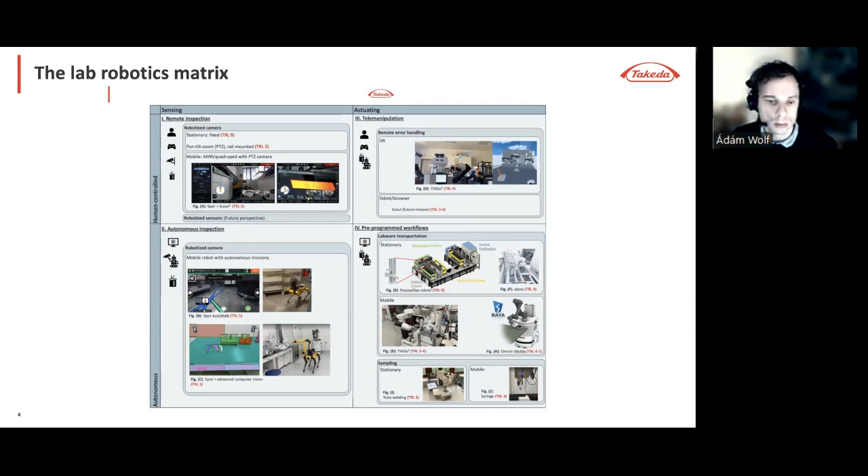So first, let's review an overall landscape of supportive lab robots. And for that, we created a systematic visualization with a two-dimensional matrix. On one axis, we represent what we want to use the robots for: whether we want to get some data from the lab via sensing, or whether we want to actually manipulate something in the lab with actuating. The second axis, the vertical one, represents whether a human is directly controlling the robot, or whether it's autonomously executing a sequence. So let me zoom in. It's quite a crowded figure.

We will begin with the first segment. That's the remote inspection. The robot is equipped with a certain type of sensor. In most cases, it's an RGBD camera, at least that's what we were experimenting with the most. The idea is to let a remote user, a standby worker or a lab expert from across the globe, take a look at a specific laboratory unit operation. Maybe there was an error, an alarm triggered, and we want to know what happened. So one would log in to a web interface, drive the robot to the location where the error occurred, and use the camera or other sensor to acquire information about what happened and whether an actual in-person deployment is needed to resolve the error.

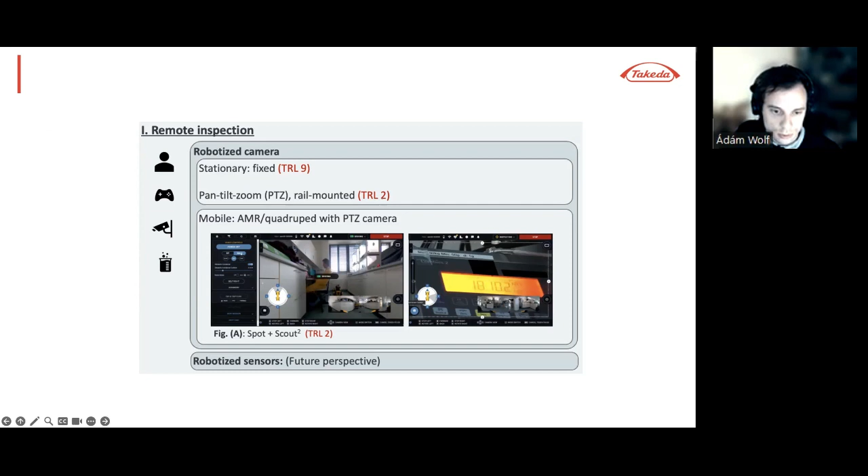The second segment is when we do it autonomously. The robot does the same, acquires visual data about a lab operation, but this time the path that it covers is pre-programmed. So you can have points of interest in the lab defined where the robot would take a picture and transmit that visual information to a computer vision algorithm to detect anomalies or just to track the status of the lab. There can be different use cases in this regard. This segmentation example on the bottom left is just one example where objects were detected and localized on the picture, and the semantic interpretation of the scene resulted in detecting anomalies in the workflow.

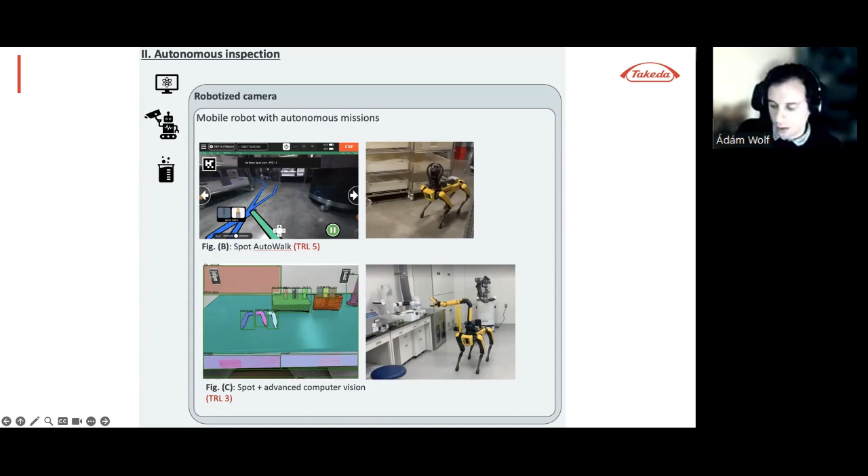The third segment is an interesting one. It's a combination of the remote inspection capability with actual manipulation capabilities in a human-controlled fashion. That means someone is controlling the robot, seeing the visual feedback from the robot, but is also capable of moving the arms of the robot to intervene in the lab process if needed. If there is an error, you would not just be able to assess what happened, but use the arms of the robot to actually resolve a physical error if it's possible.

For that, a student project focused on creating a virtual reality-based cockpit, where the user saw a three-dimensional stereoscopic image in the middle coming from the stereo cameras of the head of the robot, and also the wrist cameras for fine manipulation tasks. With the virtual reality controllers, the user was able to move the robot's arm with fine precision and manipulate objects. A series of tests was conducted to assess the usability, and lab users were capable of driving the robot and performing these basic manipulation tasks. It's important to mention at this point that on each slide, you see these red TRL numbers.

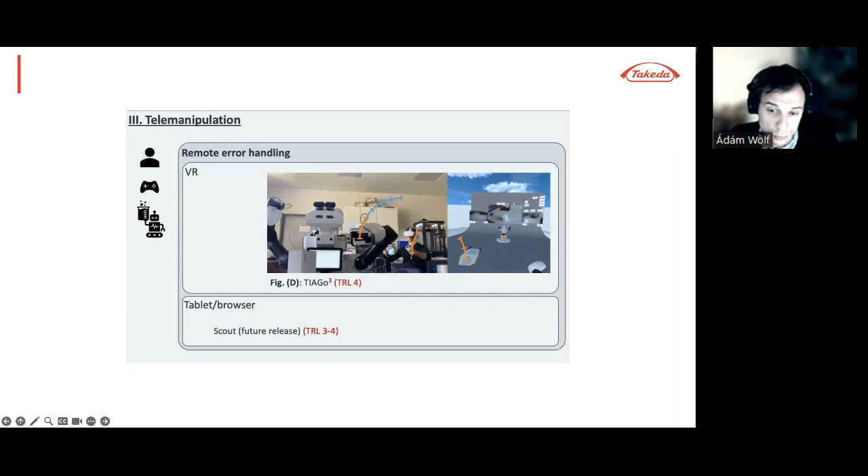And that's actually a lot of what we do in our team. We work on new emerging technologies and look for ways to deploy them in actual lab use cases. And now the final fourth category, and the biggest one, the most important one, and also the most mature one, is of pre-programmed workflows. So this means that the robot does something in the lab actively, performing manipulation, and does so in a pre-programmed sequential fashion.

So this is how most robots actually operate. Also in other domains, they have a program, a motion sequence that they perform, and that does something in, let's say, the manufacturing process. But here in our case, of course, it's nothing like that. It's more the laboratory tasks, such as labware transportation. That's one of the biggest use cases. Robots do that both in a stationary benchtop setting and in a mobile setting.

So the latter is a relatively new field, gaining coverage in the laboratory setting, but also introducing a lot of complexity. And to that, I will talk in more detail later. But here I also want to mention another use case, which is sampling with the robot. So basically, in a laboratory, let's say a biologics process development laboratory, a common use case is having to take samples from different unit operations, let's say a bioreactor or any other instrument.

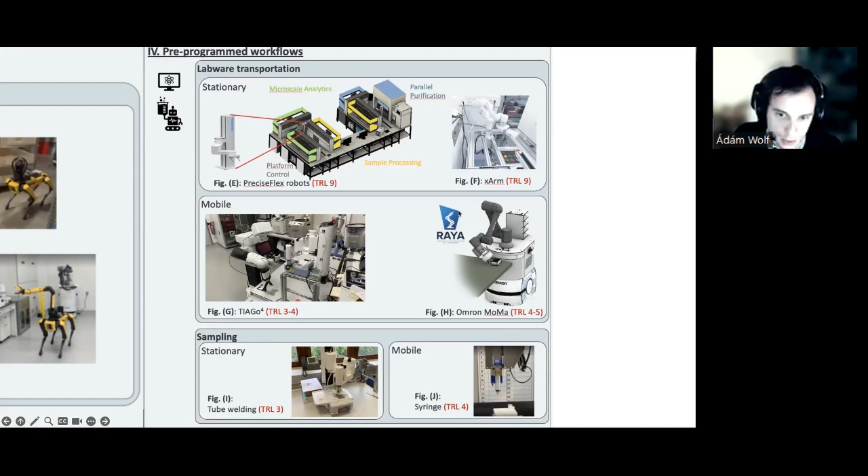So this much about the general landscape of supportive lab robotics. And as I said, I want to turn more attention to a specific segment of that, which is mobile manipulation in the lab. So when we speak about mobile manipulation, it's important to distinguish between two different sets of lab operations. One is high throughput use cases where there are routine tests and repetitive workflows. And usually these are robotized with highly customized, purpose-made robotic cells, which can operate in setup and leave or even lights out fashion.

And contrary to that, in R&D laboratories and process development laboratories, more flexibility is required. There are dynamic workflows, standalone equipment that's often not robot friendly, but designed for human operation, which means that still there is a lot of manual work included with these processes. To bridge the gap, collaborative and mobile robotics are emerging in also other segments, but starting to gain coverage in the lab scene because they can operate in human designed environments.

And that means less structured environments. So the location of the units change. They have to interface with a variety of different equipment and do that together with humans in cooperative or collaborative operation. So when we put a traditional stationary robot, like you would imagine an industrial robot, next to a mobile manipulator and compare them to humans, we see that mobile manipulators are sort of in the middle ground in terms of availability.

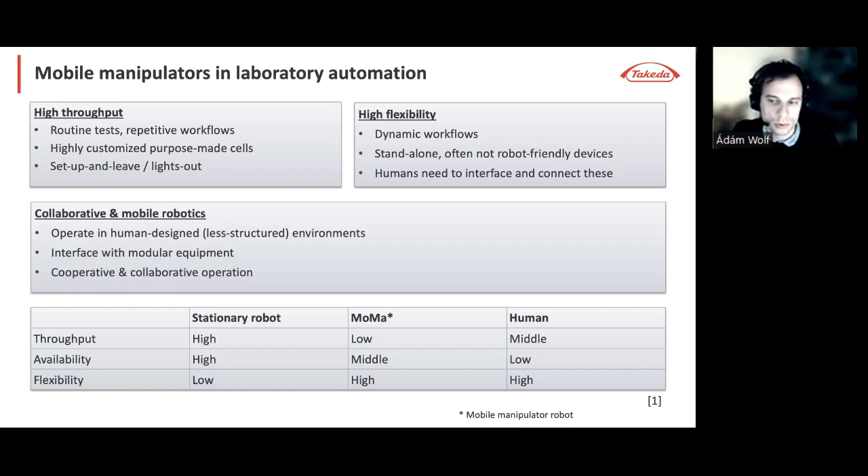So with this in mind, we had a specific use case in the lab. Here it's detailed. We had an object of interest that we wanted to transfer between different devices in the lab. And this was a standardized container, an ANSI SLAS conform, also known as SBS microplate, that is usually fed into lab devices, liquid handlers, analytical devices, storage devices at fixed handover positions, also known as sites. And there are fixtures to hold the piece of labware, the microplate, that allow a tolerance for the robot to insert it with still relatively high accuracy needed.

So that's why these applications need optical markers, so-called landmarks or fiducial markers, to aid the robot with detecting this handover position, especially for mobile manipulators.

So in our case, the pickup and drop-off locations need to be defined by means of a parameter in the command, because our workflows are dynamic, as I was referring to, how it is usually in R&D, and we need to reconfigure it depending on the requirements.

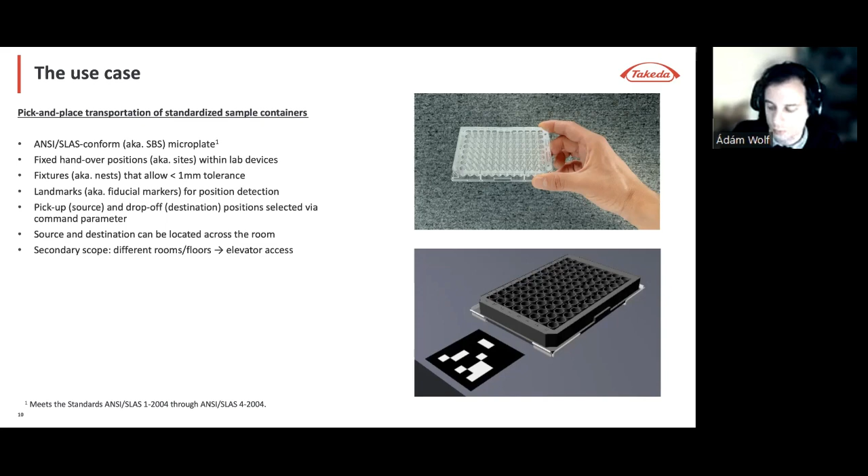And also the robot will need to navigate between not only different stations, but different laboratories and even different floors. So there is a lot of complexity that goes into it, and I will go into those topics in more detail. When we started looking into this use case, we assessed, of course, what's out there on the market in terms of mobile manipulation for lab automation purposes.

And it appears that there is already quite a landscape of solution providers who have different platforms. These have a lot in common. All of them feature an autonomous mobile robot, AMR base, which is capable of autonomous navigation, localization, and mapping. And on top of that, the integrators mounted different types of robot arms, either 4 degrees of freedom SCARA robots or 6 to 7 degrees of freedom articulated robot arms.

And what's also common that I was referring to earlier is that they all need an additional perception system to detect the fine positioning of the handover site. The reason behind that is that the mobile base itself has an accuracy maybe in the centimeter order of magnitude, but the accuracy that's needed for inserting the plate in the fixture is in the millimeter order of magnitude. So to bridge that gap, you need to localize the position.

And most of these solutions do that by vision using fiducial markers, but there are also examples with tactile probes and tactile sensing. So these robots all feature custom end effectors that are suitable for the manipulation of microplates. And that is pretty much a standard anatomy that they share. And what they also share is the fact that they are complex systems.

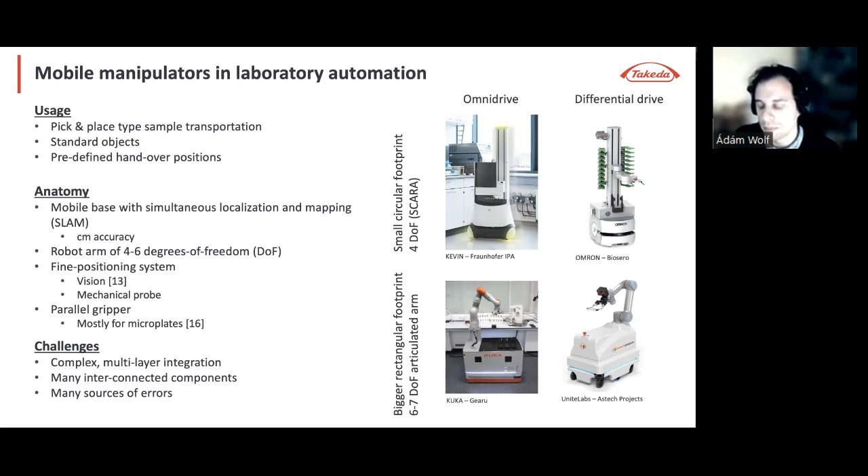So to answer the challenge, we started working on a proposal that I want to introduce today. And this is the laboratory automation plug and play framework, which is intended to serve as a reference architecture model. So the motivation behind it really starts with what we want to standardize in the lab.

And that itself starts with the bottom, with the physical layer, the process layer itself, where the containers and the physical aspects of the process are partly already standardized. So I was referring to the SBS microplate as an example. And that already makes it simpler for the instrumentation layer to interface with the physical objects. And by the instrumentation layer, I mean the lab devices.

So that is the analytical devices, the pipetting robots, but also the supportive lab robots that connect these units with each other. And as I mentioned, through the physical interfaces like the standardized gripper, these two layers can interact physically.

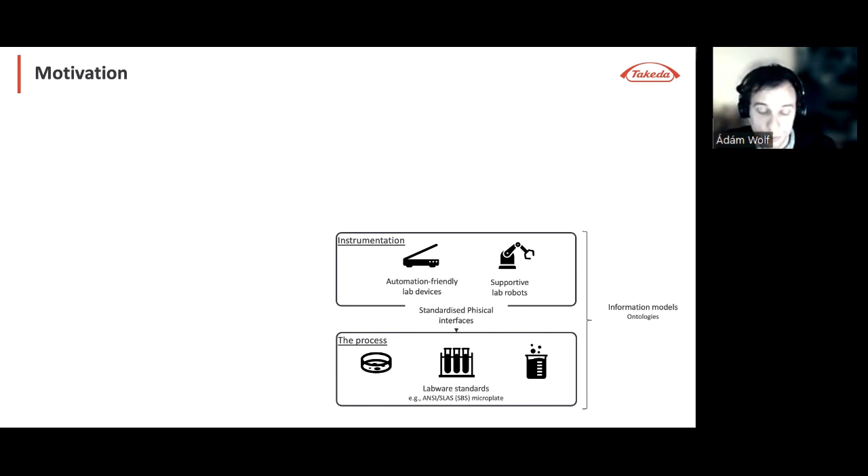Now, talking about the assets in the labware and the instrumentation, it's important to mention that to maximize the ease of integration and aim for plug and play integration, we need to represent the relevant pieces of information about each asset in a standardized and compatible data structure, or so-called ontology, to enable a master control layer, an orchestration layer, or scheduler layer to actually control the process.

The instrumentation layer is the one that the orchestration interfaces with, in the best case scenario, via a standardized communication protocol. And by standardized, I mean an open protocol that is not proprietary, documented, and free to use. Of course, there are proprietary protocols, but that's exactly where we want to get away from and strive for standardization in all of the aspects that I am presenting right now, also including the process programming aspect to represent the workflows in a standardized fashion that's transferable between different laboratories and has a suitable level of abstraction to do that.

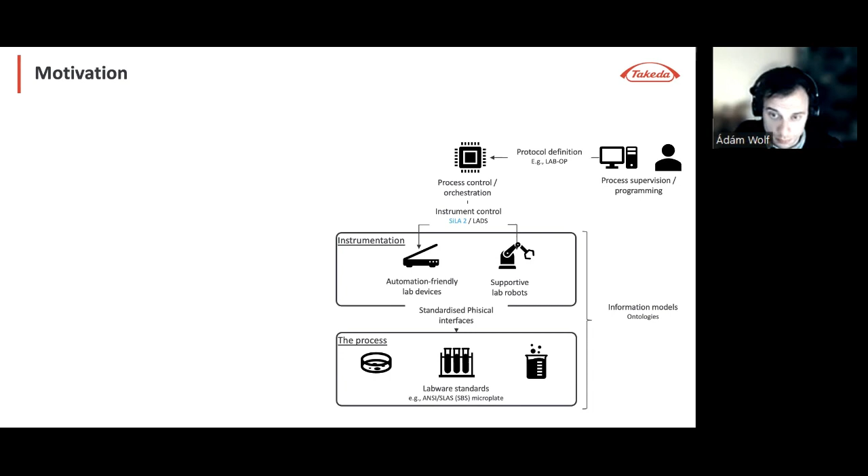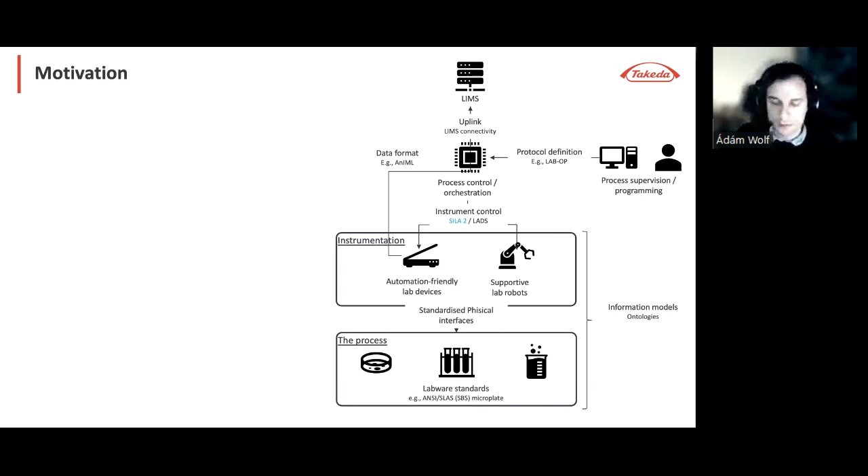And of course, ultimately, we want to have an uplink towards a laboratory information management system because we want to get the data out of the instruments. And the data format itself is certainly something that we need to standardize. And there are already initiatives to do that. The problem with the present state is that these systems are becoming increasingly complex.

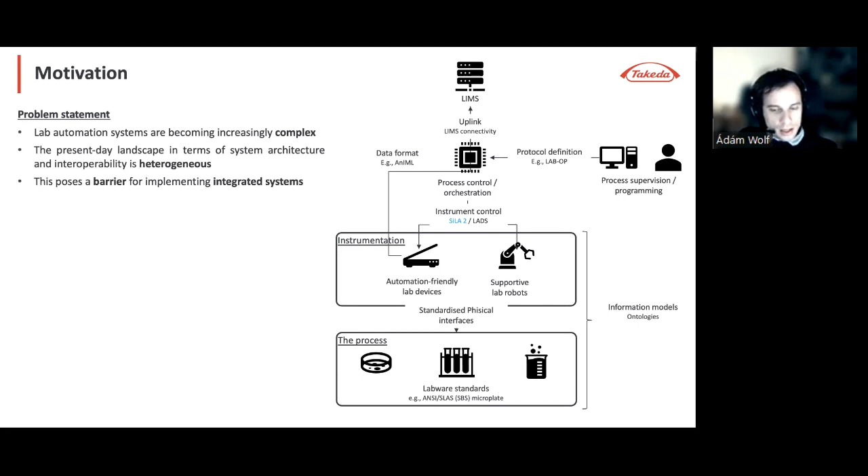And it's a fairly heterogeneous system architecture that we are dealing with. And of course, this poses a barrier for implementing these systems. So what we propose is, with the laboratory automation plug and play concept, to create a holistic and agnostic reference architecture model for covering the whole vertical of the laboratory automation ecosystem by outlining the canonical layers and components in

the integrated system and the control architecture, and also allocating existing building blocks for different aspects and creating an overarching blueprint how to combine them or how to extend them with additional components to achieve a standardized communication between the components and also create the standardized information representation aspects that I was referring to.

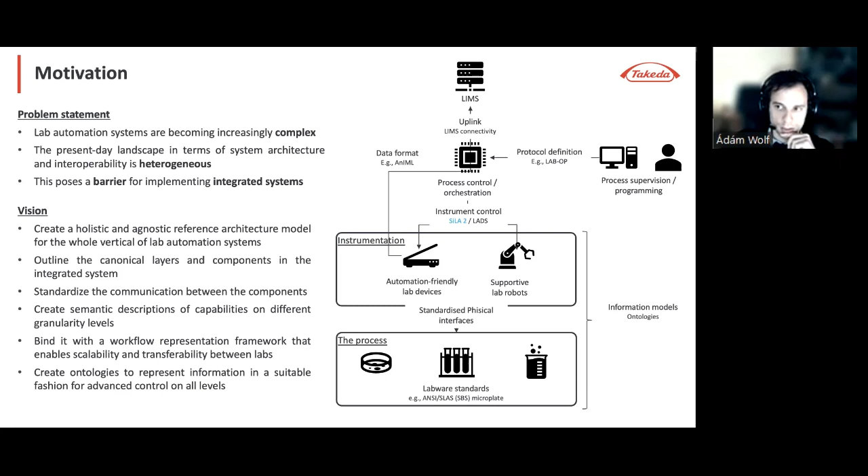So this is exactly what the LAPP concept itself, and this is something that we published in scientific papers, outlines. We have a hierarchical decomposition of the robotized lab workflows, a multi-layer control architecture, and these two are mapped against each other. And also the information model in the form of a digital twin, a device-centric information representation to achieve ultimately, in the case of supportive lab robots, a teaching-free plug-and-play integration of the lab devices. And then, of course, communication protocols that I was already referring to.

And on the bottom, you see how this endeavor was addressed by the means of a series of projects, first starting with the early technological readiness level in the form of the concept proposal, and then creating academic proof of concept studies, and then working towards the industrial implementations that I will present in the second part of the presentation.

But first, let me draw your attention more to the concept itself and start with the hierarchical decomposition of the lab workflows. And that really starts with looking at what a specific lab provides as a service, a set of services. So be it like high throughput screening or microscale process development services. This is a bunch of experiments that the specific lab setup can run, conduct, or execute. Experiments, could call them assays or procedures, like chromatography, parameter optimization run.

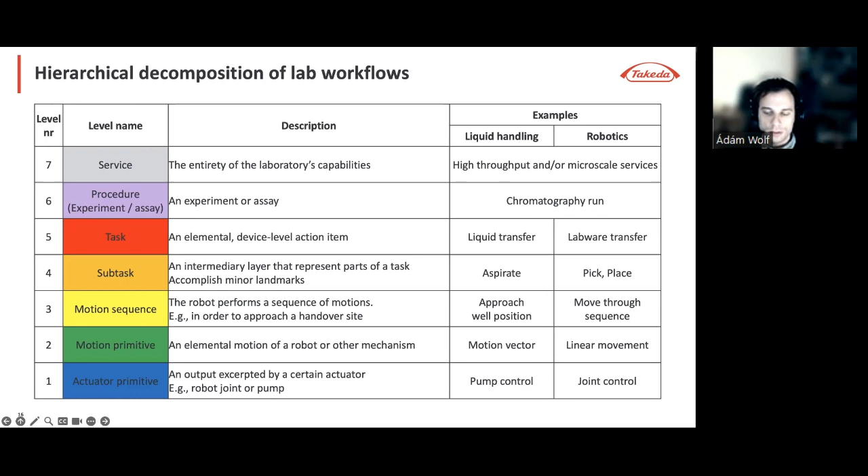And then come the low-level parts that are, in most cases, masked away from the lab orchestration layer and dealt with by the low-level robot controller, middleware, or even the embedded controller that I will present in the next slide. So these are the motion sequences and motion primitives, and ultimately the joint level actuator primitives.

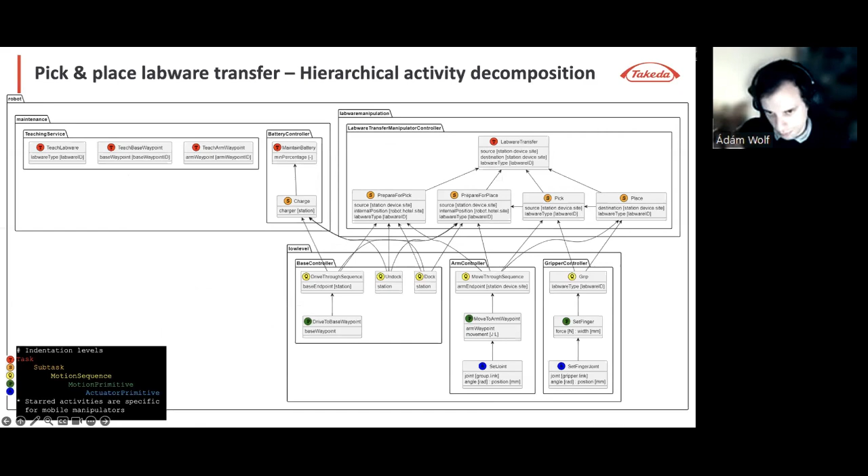But the most important one, and that's the one that's usually exposed, let's say via SiLA interface, standardized laboratory automation communication protocol, is the task and subtask level activities for the outcome-oriented task. So that means the labware transfer itself is parameterized by really just the source and the destination location, and maybe a labware type or labware ID. And it's broken down into picking and placing, and also letting the source and destination device know when to prepare for input or output.

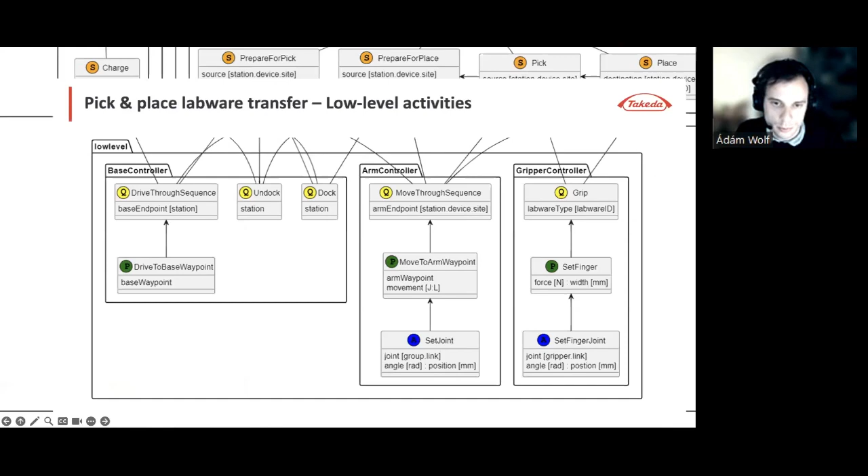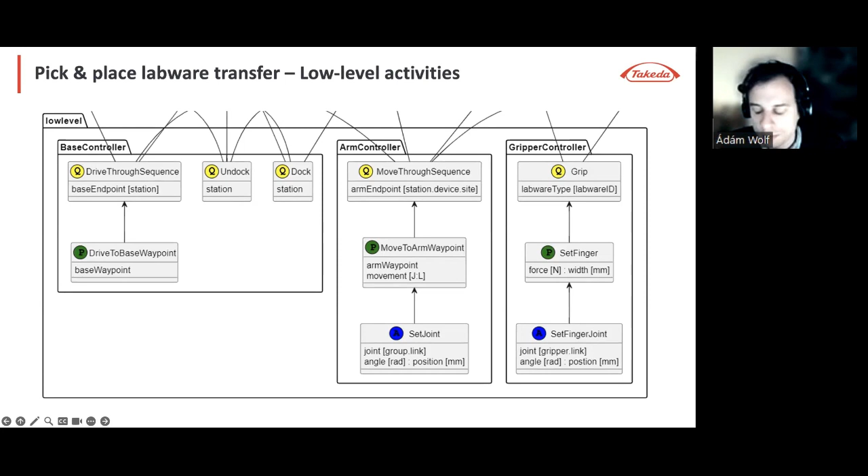What's below that, and this was also visualized on the previous slides, the low-level part, as I said, is masked away from the high-level controller, from the scheduler. So this is already from the robot's perspective, from the perspective of the components of the robot, the arm, the base, and the gripper. And it's the robotic middleware that controls the motion sequences.

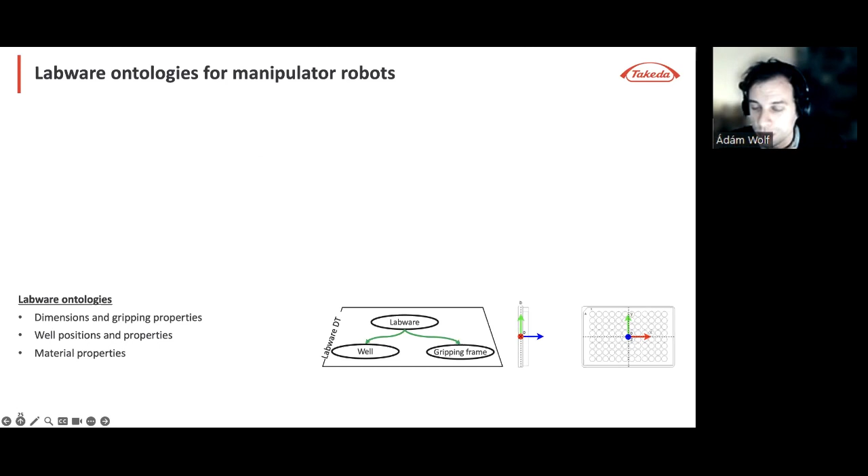Now, arriving to the second aspect, the ontologies, I want to introduce what we consider the most important piece of information for supportive lab robots, the relative hierarchic representation of frames of references. So basically, positions within the context of the asset. And this asset can be a piece of labware or a piece of lab equipment.

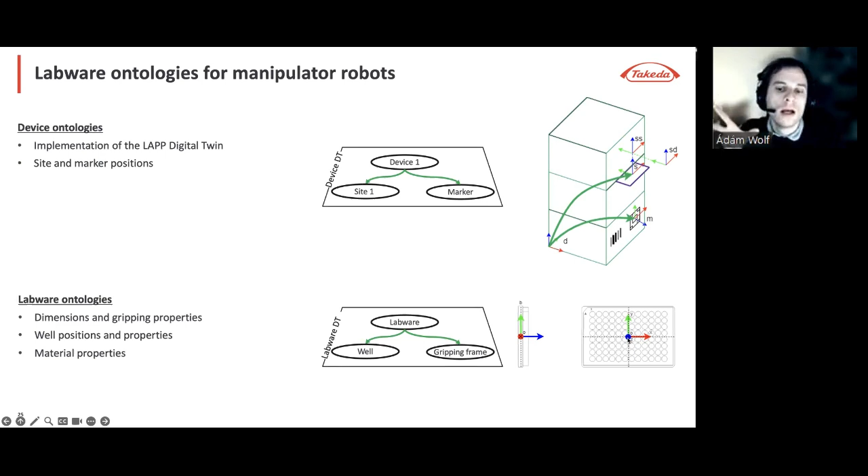In each case, we need to represent the position of the previously mentioned optical marker that the robot can detect and bind to its own coordinate system, and the frame of reference for the handover site, where finally the robot needs to place the labware and ultimately align the frame of reference of the labware with the frame of reference of the handover site. So how it looks in more detail and more visual representation, how it's connected.

Here you see in green what we call the digital twin instance of the device. So in this representation, you see the relative positions in the context of the device between a device coordinate system, the marker, and the handover site. So the robot tracks its own configuration with kinematics and motion control, and also navigation.

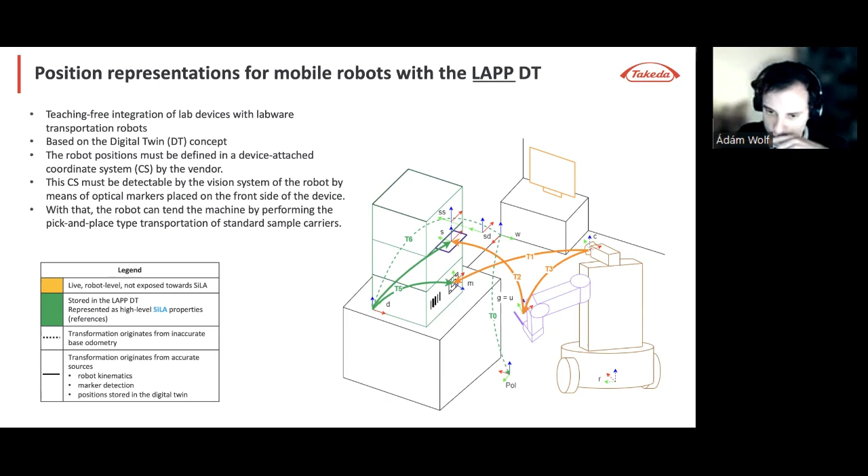And when the computer vision functionality kicks in, that's when the robot can bind the reference of the device with its own coordinate systems. But let me switch to the next slide where this hierarchical representation is visualized from a different perspective. So here you see how the coordinate transformations are connected.

So basically, in each case, the robot localizes itself with relation to a map of a room, and there are different stations located on this map. And at each station, there might be an array of devices, each device having its own array of sites where the labware can be located.

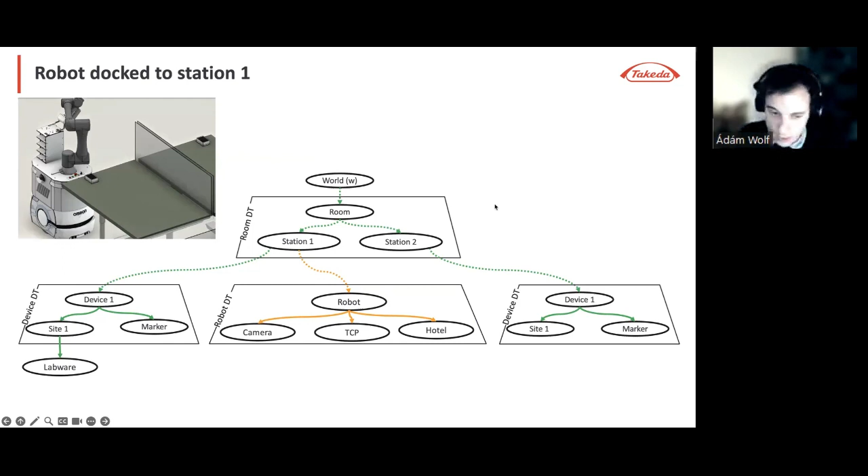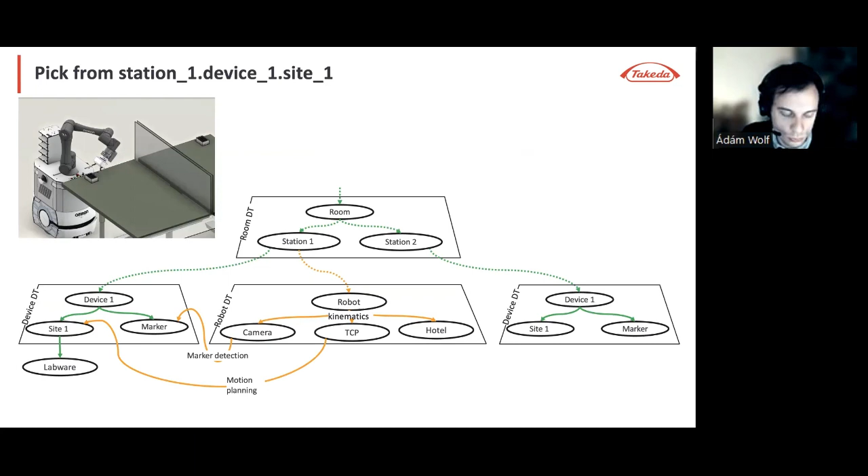And the robot needs to drive to the first station, localize itself inaccurately with relation to the map, but then accurately detect the marker position with computer vision, plan the motion from the tool center point of the end effector to the pickup site, get the labware to the tool center point, position it on the onboard storage or hotel,

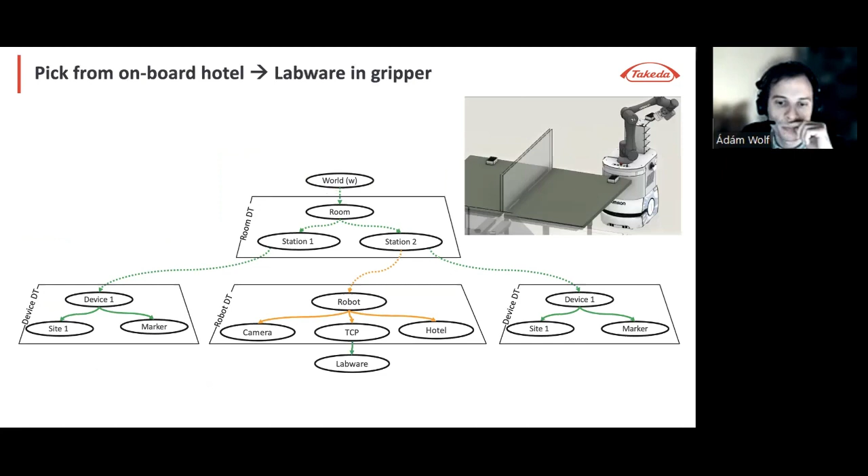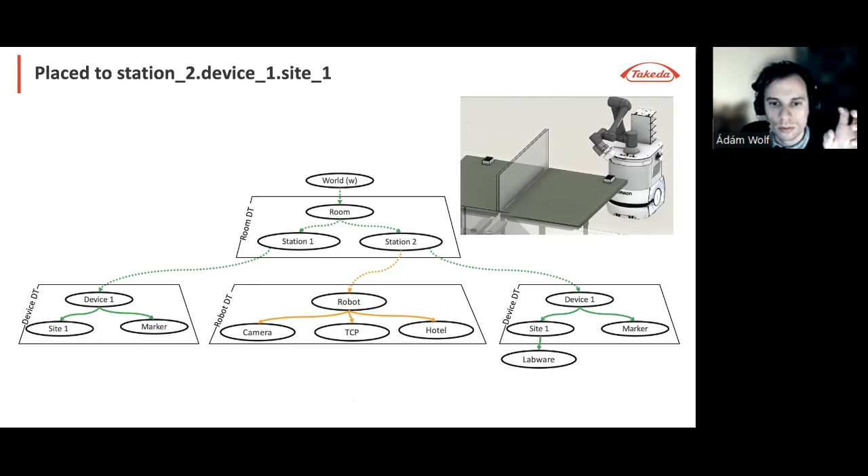then navigate to the next station with simultaneous localization and mapping in the centimeter accuracy, pick the plate from the hotel, detect the marker of the second station, do the motion planning again, and finally place the plate there. So this is in sequence how the digital twin concept comes together, how the hierarchic representation of the positions is implemented.

So to create proof of concept studies, we took existing building blocks for specific aspects of the ecosystem. And as such, I already mentioned standardization in laboratory automation, or SiLA in short. I'm wearing my second hat besides Takeda with the SiLA consortium as the lead of the robotics working group. And as such, I wanted to also talk to this topic.

SiLA as a consortium is a not-for-profit membership organization. It provides a platform for exchanging and collaborating on the development of the standard itself, and that's the core working group, and on the development of domain-specific guidelines and feature definitions. That's what we do at the robotics working group. The standard itself has 3 layers: the specification, a conceptual one, a technical one, and then a domain-specific collection of features.

From the technological perspective, it's a service-oriented interoperability protocol where a lab device, or as a matter of fact, also a lab robot, is considered as a service provider that implements a set of features. And the service consumer is considered as a client that triggers specific commands as part of these feature definitions.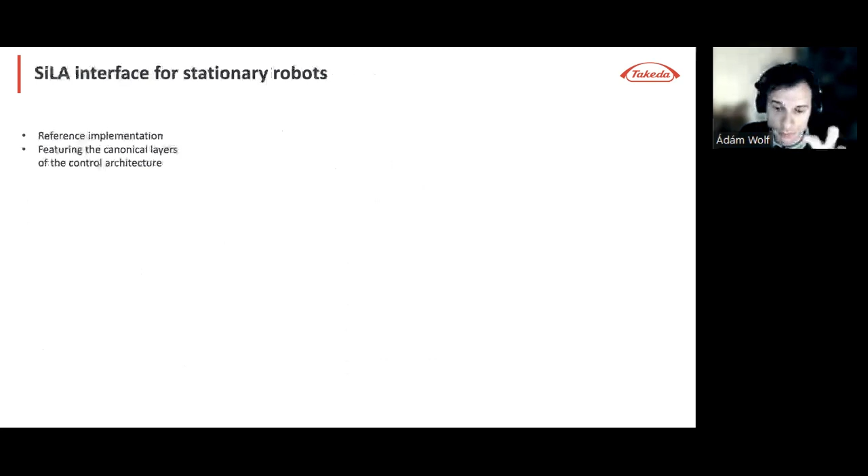Now, speaking specifically to the reference implementation for standardized stationary labware transfer, I want to introduce a setup that we created in the course of one of these hackathons. Two types of robots, both stationary benchtop robots, connecting to storage units and a plate reader as an exemplary workflow, a set of sensors and actuators, an embedded controller for each robot, and also for the plate reader, a device level controller, and on top, a scheduler. So here you see the same canonical layers that I presented earlier towards the beginning of my presentation.

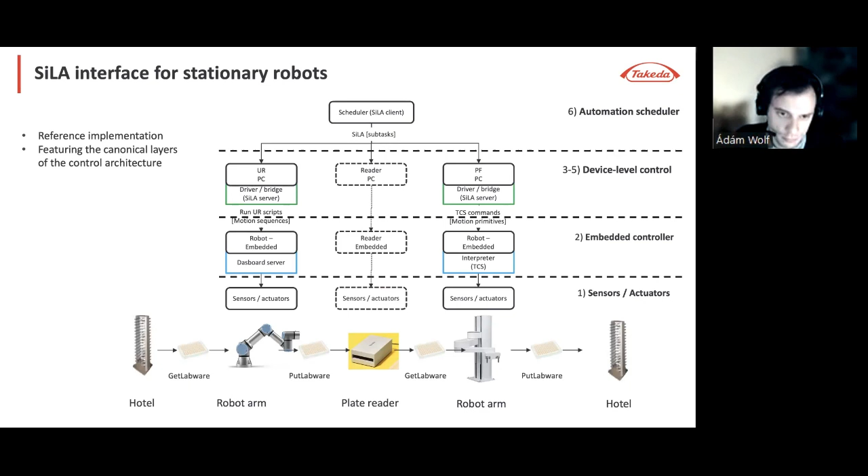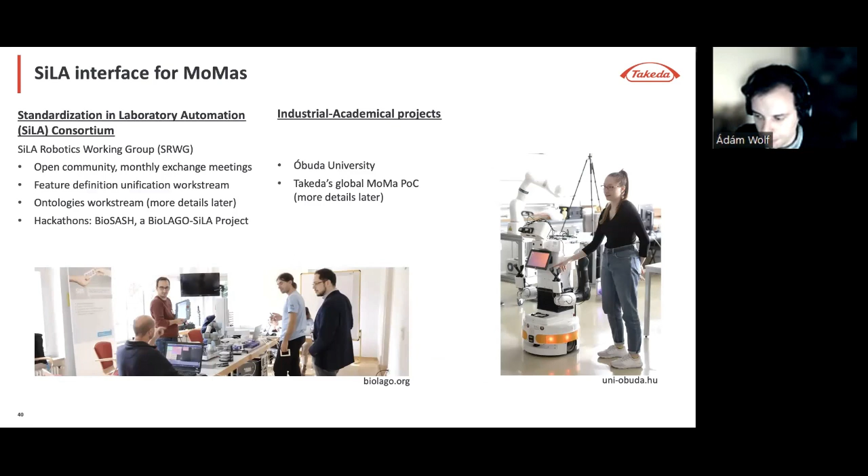This means that SiLA is responsible for the high-level scheduler side of communication, while ROS is responsible for the low-level, the robot-specific communication. And the bridge implements both a SiLA server and a ROS action client, service client, or topic interface, depending on what low-level robot interface is available.

It's important that throughout this exercise, we created a table where we mapped the concepts of the SiLA ecosystem against the concepts of the ROS ecosystem. I won't go into more detail on that for the sake of time, but just for example, an observable command on the SiLA side is implemented in most cases as an action on the ROS side, because this is an activity that typically takes a bit longer and you want to get continuous feedback from the scheduler's perspective also.

So the reference implementation at the Óbuda University also addressed a similar workflow as we did with the stationary robots, and utilized again the canonical layers of the system architecture. The device level control layer was the most interesting one. There we implemented the SiLA-ROS bridge and also an interface to the digital twin of the devices to get the positions that I presented earlier.

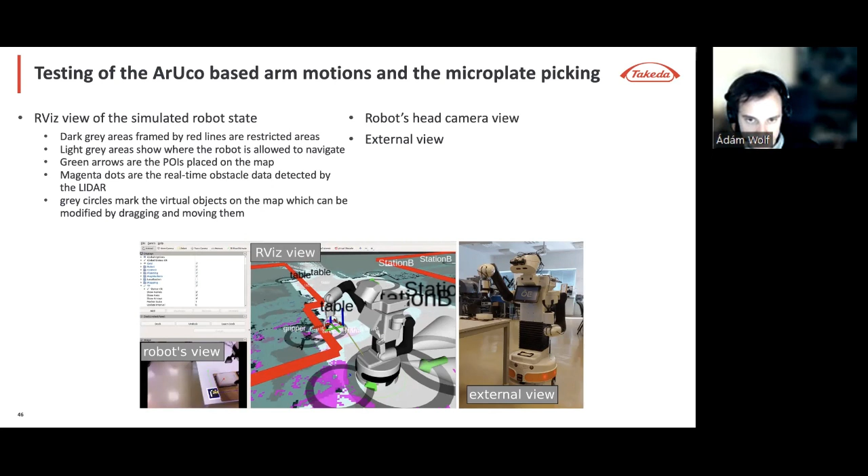And now let me proceed to the more mature reference implementations, or I would say the pilot projects that utilize the same concepts, but now in an industrial setting. So at Takeda, we have use cases in the lab with a set of lab devices that we wanted to automate and integrate with each other to have an end-to-end workflow. And to do that, for the sake of flexibility, we decided to use not stationary but mobile manipulators. First, only one of them, but then potentially combining multiple different ones in one system.

So in our case, there was a selection of specific devices and interfaces and robots, and also middleware for the robots. It was based on Omron components, an autonomous mobile robot and the collaborative robot arm integrated by EngRoTec and controlled via SiLA by the Green Button Go scheduler from Biosero.

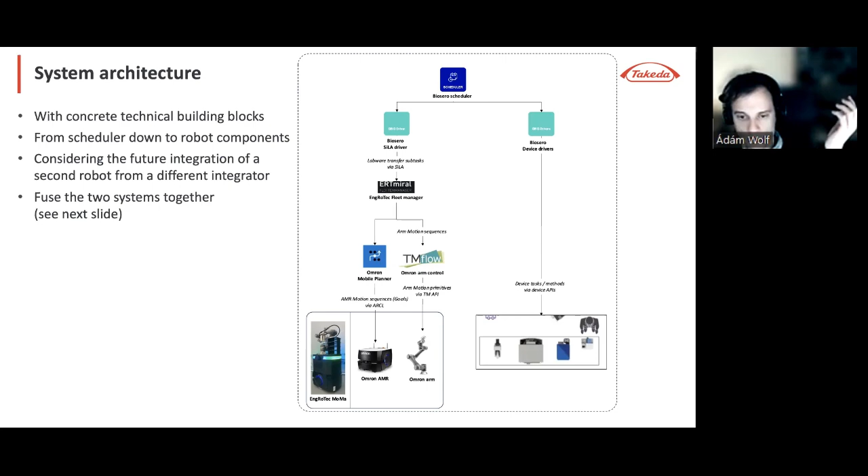So this is an ongoing project. We are still working on figuring out the actual system architecture to cover all of the complexities of the landscape, and also considering scalability and future extensions. And there we arrive at the future state where we will have multiple robots from different vendors.

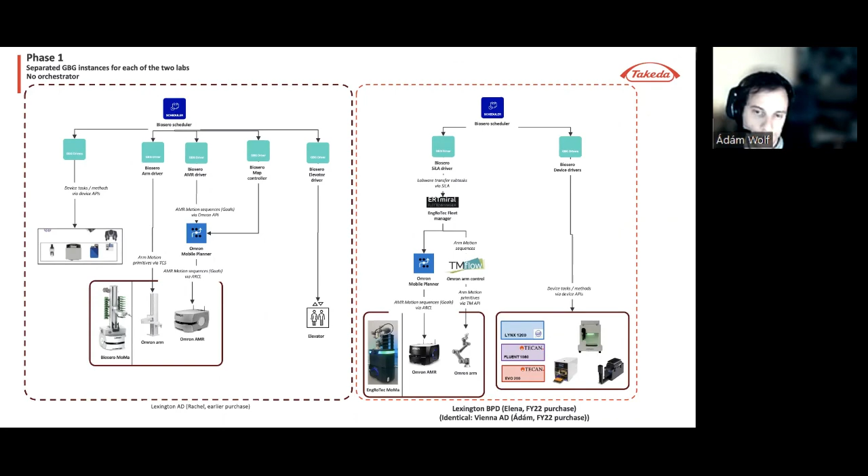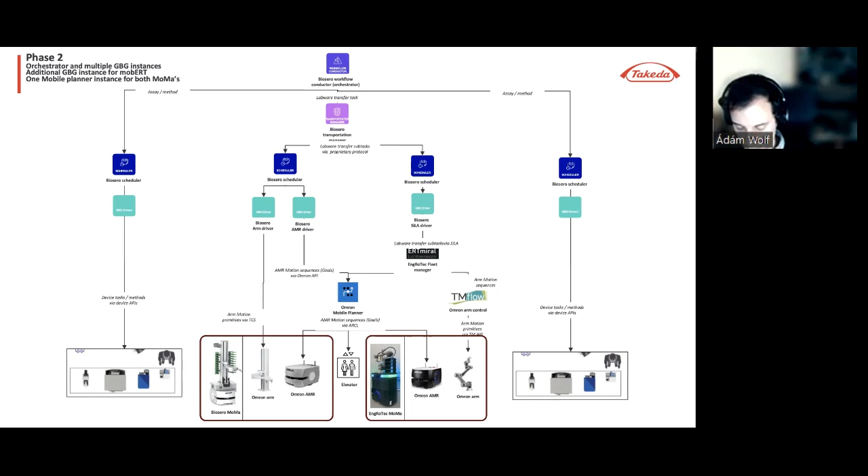And we want to initially set up separate systems, separate scheduler instances, but eventually combine them into a fused overall integration platform with the help of an overarching orchestrator and transportation layer. So there are really some intricacies to that, figuring out which component is responsible for controlling the elevator. Is it the fleet manager? Is it the middleware? How we can bring together the two ecosystems to form finally one functioning, and in an optimal manner functioning, system.

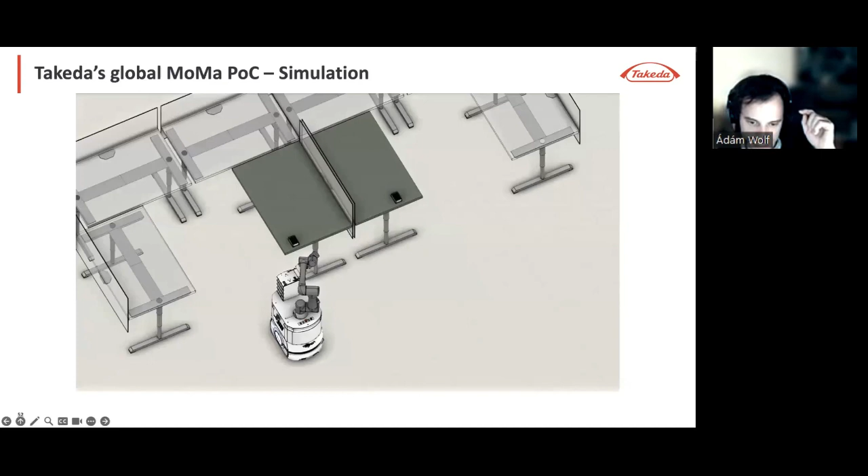Finally, to close my presentation, I want to present a few videos, starting with how we started during the planning with computer-aided design-based simulation from Agrotech. And this was used also for the sequence that I presented for the hierarchical position representations. So here you really see just a benchtop transportation. But the next one is a more, I would say, fancy one.

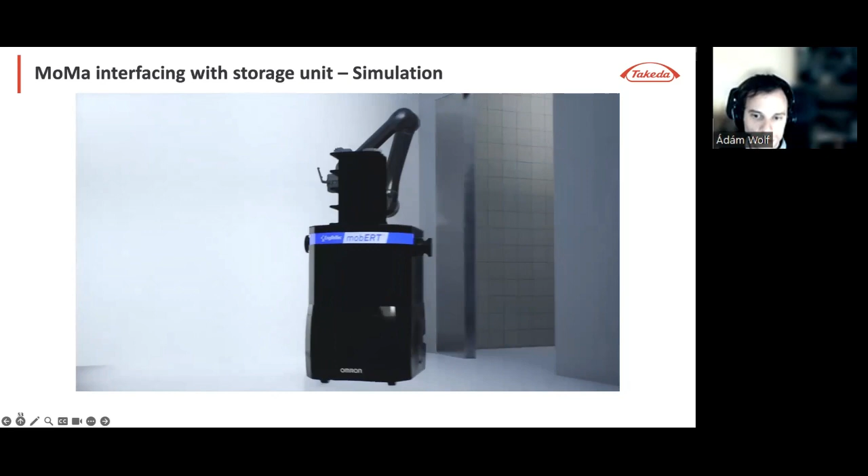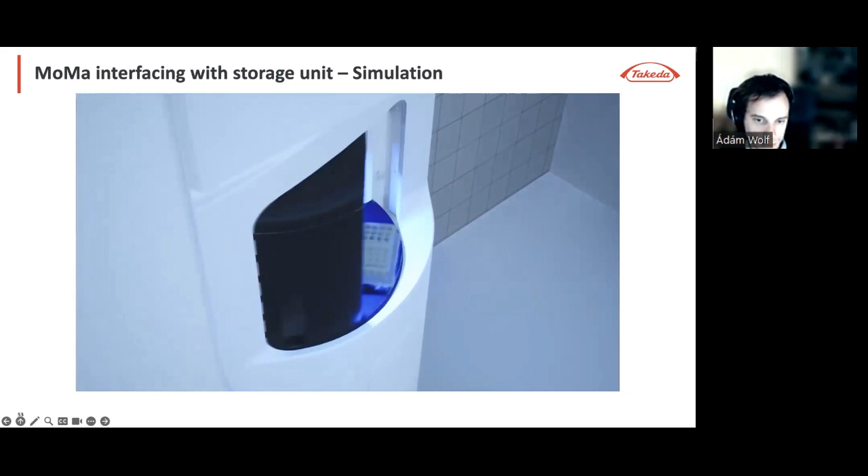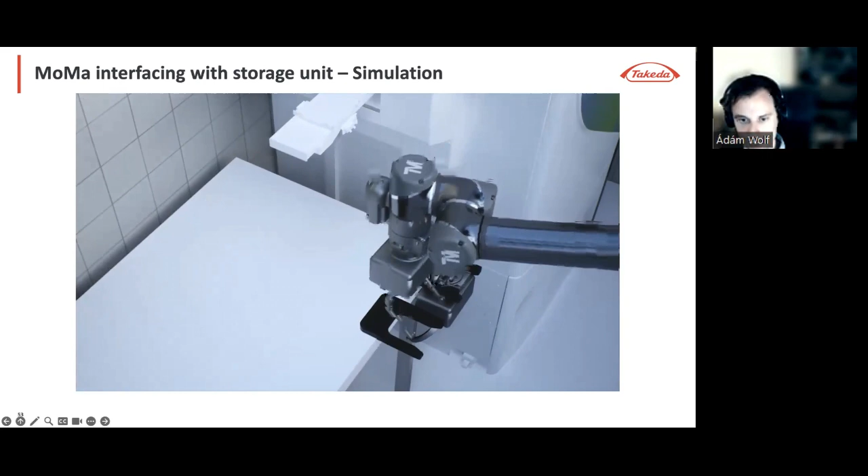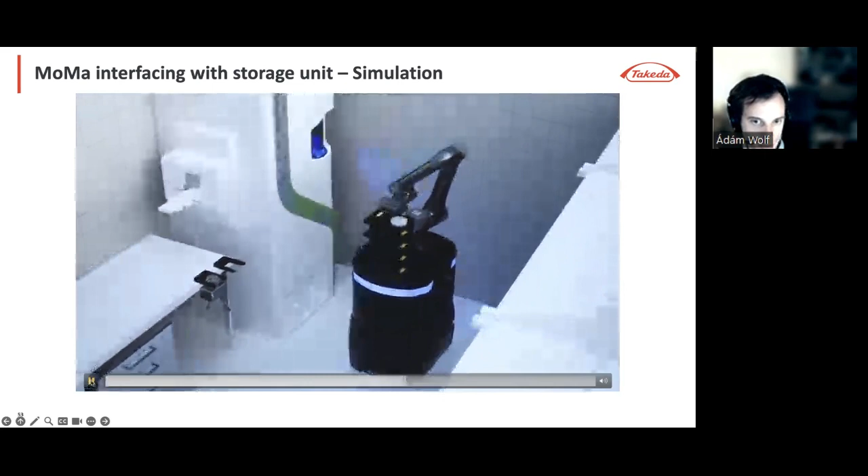Here you see the robot actually interface with an automated door and then arrive to an automated storage unit, again using the computer vision system to detect the handover site, load the microplate, and then arrive to the next interesting feature, the tool changer, where you can swap the end effector for a different one. And instead of microplates, this time be able to manipulate Petri dishes. So here I will stop when it picks it up, but I think you get the benefit that this tool changer provides in terms of flexibility.

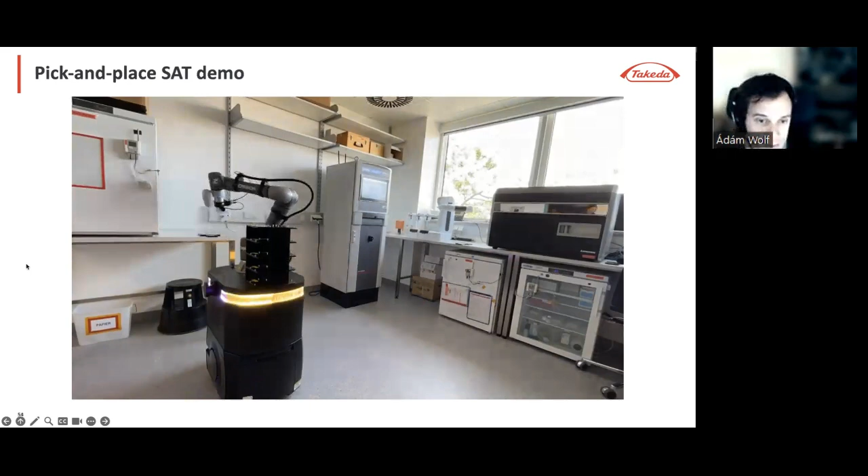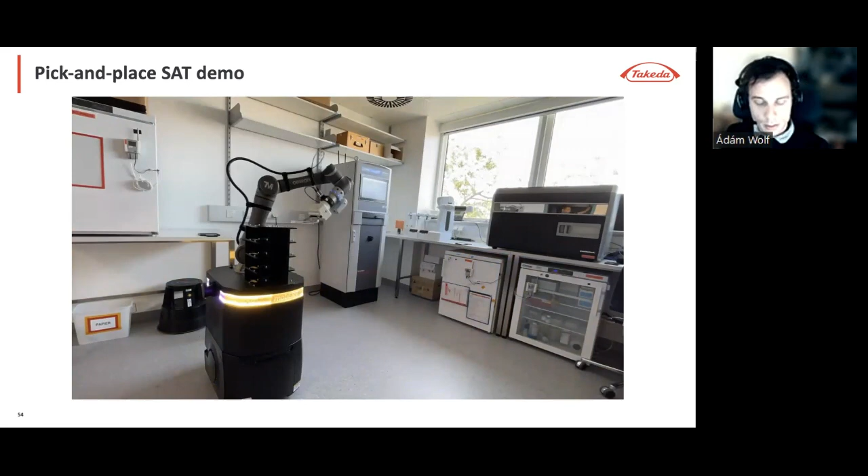So finally, the actual site acceptance test looked like this. The robots performed in the lab, same sequence from one bench to the next bench, and successfully did so also in a looped fashion for stress testing. And this is where we are right now. We are taking a step-by-step approach towards achieving the overall integration architecture that I presented as a concept. We do that from bottom up. So on top of the robot middleware, we will implement the standardized SiLA interface and connect it to the scheduler and then to the orchestrator.